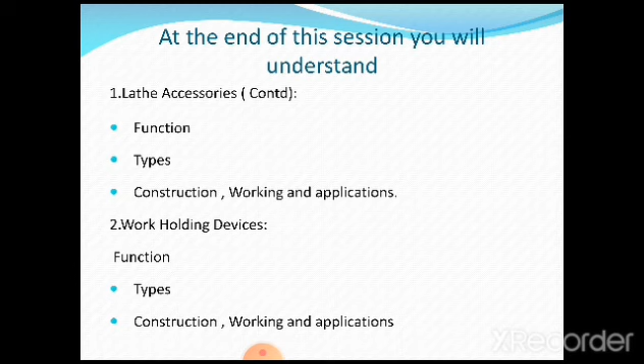In the last class we discussed lathe centers and chucks. We know very well, whenever we want to hold and rotate a very long workpiece, we generally use two types of centers. The headstock center is also known as a live center because it rotates along with the workpiece, and the center which is mounted on the tailstock supports the work and is stationary.

And whenever the workpieces to be held are slightly smaller but a bit larger in diameter, we use different types of chucks. We discussed the 3-jaw universal chuck, 4-jaw independent chuck, combination chuck, magnetic chuck, and collet chuck. All these chucks have different features and are used for holding different types of jobs. These concepts we have already discussed in the previous session.

Lathe centers and chucks are the most essential accessories, always used in our machine shop. The remaining ones we are going to discuss are used basically in industries, tool room lathes, and workshops with continuous production, where different types and diameters of jobs are held. Lathe centers and chucks are the most commonly used in polytechnic and engineering colleges; the remaining accessories are shown to demonstrate how they work, but we do not practically use them. So this is the main concept.

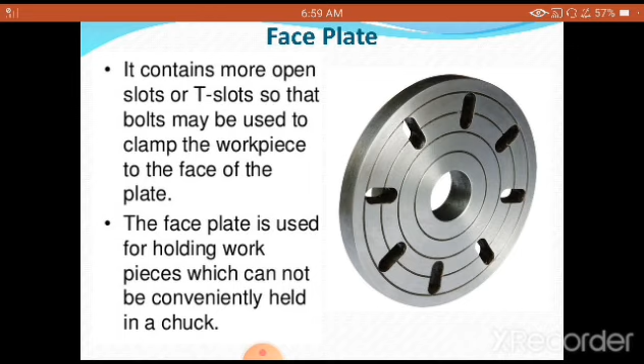The faceplate is used for holding workpieces which cannot be conveniently held in a chuck. If the configuration or shape of the workpiece is slightly irregular, in that condition we may require the faceplate. That is the main function of a faceplate.

The next one coming up, which is important, is called an angle plate. The reason to call it an angle plate is because it basically has two plates which are at 90 degrees to each other. So if you are going to see the views here, if you consider this as the front view, this is the figure which you are going to see.

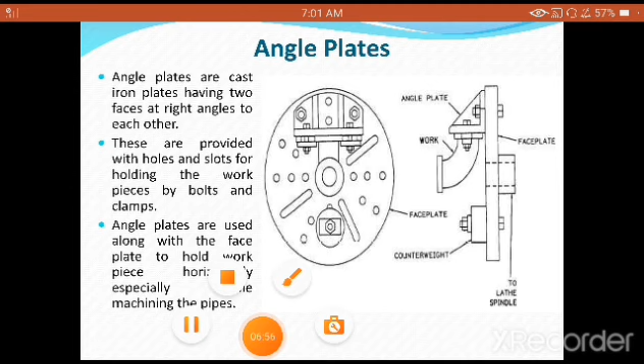Again I'll re-explain it. Suppose if I see this portion in this way, then this is the view which you are going to see; any one of them can be either side view or front view. Generally we consider this as a front view and this as a side view. So angle plates are cast iron plates having two faces at right angles to each other.

So let us see where it is now. Here are the different parts. The first one which you are going to see is a faceplate. A faceplate has to be used whenever I want to use the angle plates. As we have discussed, this is the configuration, the structure of an angle plate. This is a 90 degree plate which is directly mounted on a faceplate itself. This is the faceplate which you are going to see.

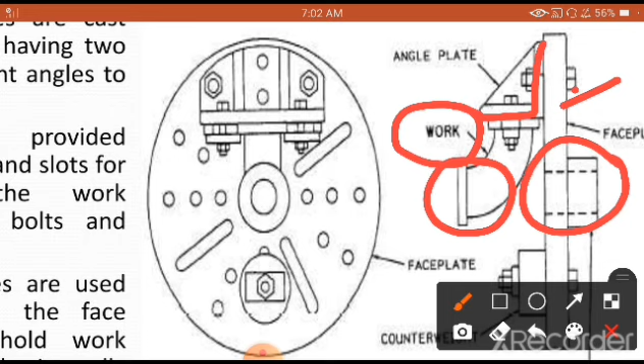The faceplate is directly mounted onto the headstock spindle, and at the front portion there is a mounting of the angle plate, and this is a typical workpiece which we require to machine. This workpiece is known as a pipe elbow, generally having a certain angle which is to be machined. It cannot be held firmly directly on a chuck or between the centers, so we require the help of an angle plate as well as a faceplate.

These are provided with holes and slots, as you are going to see here. Angle plates are also having holes like this for holding the workpieces by bolts and clamps, and you are also going to see clearly the bolts and clamps which are used there. Angle plates are used along with the faceplate.

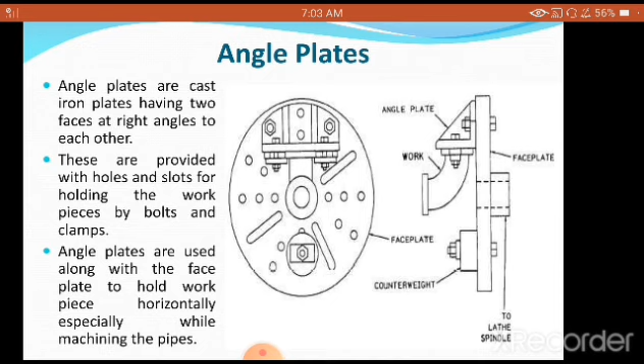Angle plates are always used with the faceplate only to hold the workpiece horizontally, especially while machining pipes. Whenever we want to go for certain angled pipes, we are going to use both the faceplate as well as the angle plate together for proper machining. So that is the main idea of using the angle plates.

Now let us go to the mandrels. This is also a very important concept. A mandrel is a solid shaft. Try to understand the definition here. It is a solid shaft made of high carbon steel. You already studied in your workshop technology the different types of materials along with their composition, properties and applications. We use high carbon steel because we require more wear resistance.

Because this is used basically for holding different diameter hollow workpieces, that is the main function of a mandrel. Now we are going to discuss it in detail. First we shall define a regular mandrel, which is commonly used. A mandrel is a solid shaft made of high carbon steel and mounted between the centers. This is very important: it is mounted between the tailstock center and headstock center, and this is called a mandrel.

On this mandrel we are going to mount the hollow workpieces. This is a hollow workpiece, meaning it is a hollow cylinder of a certain thickness which is directly mounted onto the mandrel. We require to hold at this end as well as the right end and the left end with the help of centers, for making the workpiece rotate. That is the main concept here.

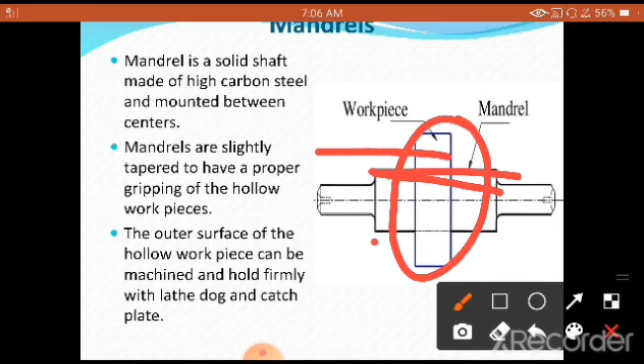Mandrels are slightly tapered. The main purpose of making them tapered, instead of straight, is to have proper gripping of the hollow workpieces. This is the main idea here. We want to hold firmly the hollow workpieces. For that purpose only, suppose if it is straight, then this workpiece will come out directly. So that is why it is slightly tapered, so that it can be held firmly.

The outer surface of the hollow workpiece can be machined. So now the main purpose is to machine this portion directly. For that purpose we are going to use the application of a mandrel. It can be machined and held firmly with the lathe dog and catch plate. These are additional accessories which are used, which we are going to discuss with sketches. But you need to understand that mandrel is used basically to hold the hollow workpieces. A mandrel is a solid shaft, tapered, used for holding hollow workpieces. That is the main function of a mandrel.

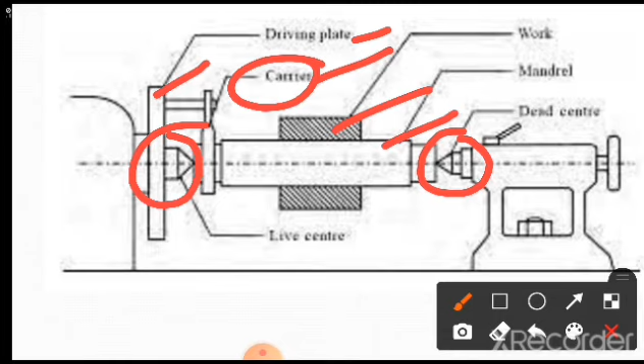Now you are going to see very clearly on the sketch the same figure. Here, this is called a live center and this is called a dead center, this is a mandrel, this is a workpiece, this is a carrier or lathe dog, and this is the driving plate. So all are mounted together. In this figure you will see how many accessories are required: driving plate, catch plate, and mandrel, and also the centers. So nearly 4 types of accessories are used for holding the hollow workpiece.

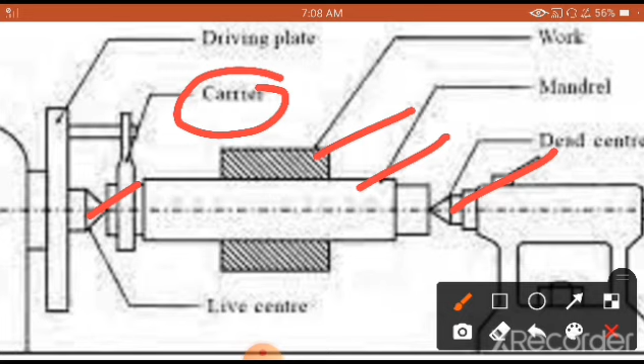Whatever workpiece you are going to see on the sketch is a hollow workpiece, held between the 2 centers. This portion is called the mandrel, this whole portion. This is a dead center, this is a live center, and whenever I want to hold the hollow workpiece I require a carrier and the driving plate. So what happens here is the mandrel is made to rotate, and along with that the workpiece is made to rotate, and these surfaces can be machined very easily, whatever diameter is there. Otherwise there is no other facility through which we can machine especially the hollow workpieces.

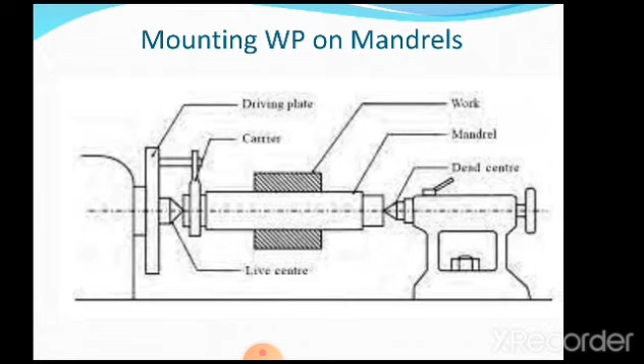The solid cylindrical rods or workpieces can be easily machined by holding between the centers or in a chuck. But if the workpiece is hollow, then we have to use mandrels. So this figure shows how the workpiece can be mounted using mandrels. Now let us understand in brief.

In mandrels also there are different types which are used depending upon the type of hollow workpiece. So that is what we are discussing. Nearly there are 7 types of mandrels which are used for holding the hollow workpieces.

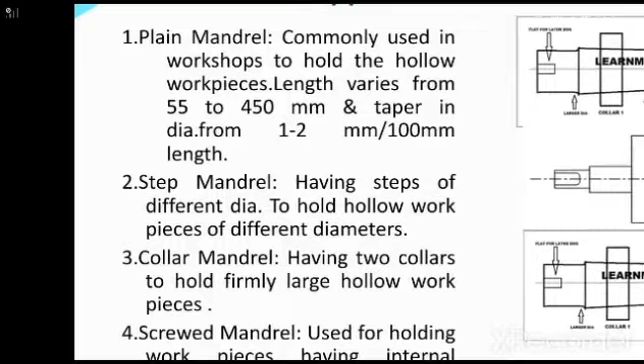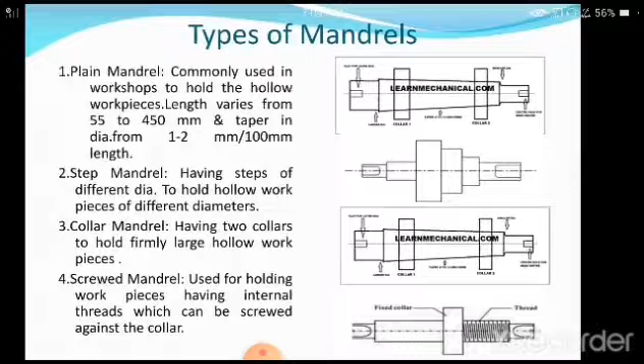Now let us start with the plain, meaning a commonly used mandrel. This is called a plain mandrel. Just we have discussed about that. It is having 2 collars here. So let us read: it is commonly used in workshops to hold the hollow workpieces. It is the most commonly used type of mandrel in the workshops. Length varies from 55 to 450 millimeters.

This means its length will vary. It varies from 55 millimeter to 450 millimeter maximum being produced. Then what amount of taper is it having? It is having a taper in diameter from 1 to 2 millimeter per 100 millimeter length. That means it should be slightly tapered.

Now we need to make the mandrel slightly tapered. If it is not tapered, the workpiece will come outside. So for that purpose, it is made slightly tapered, and the amount of tapering varies from 1 to 2 millimeters.

What is the meaning of taper here? If I go 100 mm along the length, I should have 1 or 2 millimeter diameter reduction. To give a simple example, suppose the length of the mandrel is 100 mm.

I have taken an example of 100 mm. If it is 100 mm length, then what should be the reduction? It should be 1 to 2. Suppose this diameter is 30 mm, then this diameter should be 28 or 29 mm. There should be a slight amount of tapering along the length.

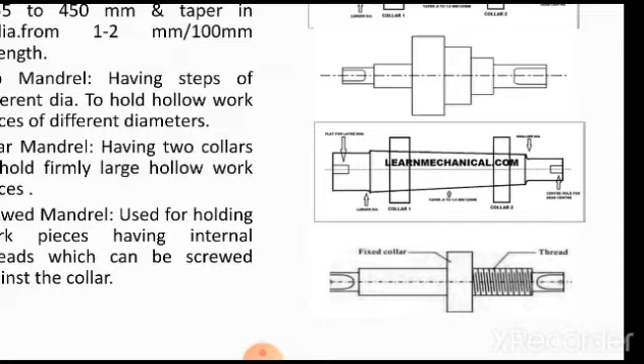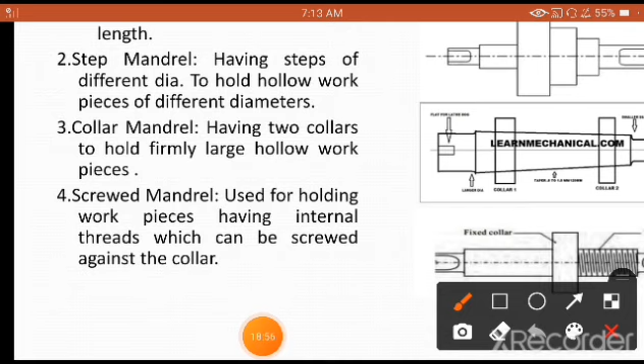The next one is the screwed mandrel. Screwed means what? The whole thing together we call a mandrel, but it is having screws here, as you will see on the screen. I will just show you now again.

I am making it slightly bigger now. Now you will have threads here and one side a fixed collar. Why is this used? Suppose our hollow workpiece has internal threads - then we can hold the entire hollow workpiece firmly onto it. In this portion, I can consider the hollow workpiece which has tapping or internal threads, so as to machine the external diameter.

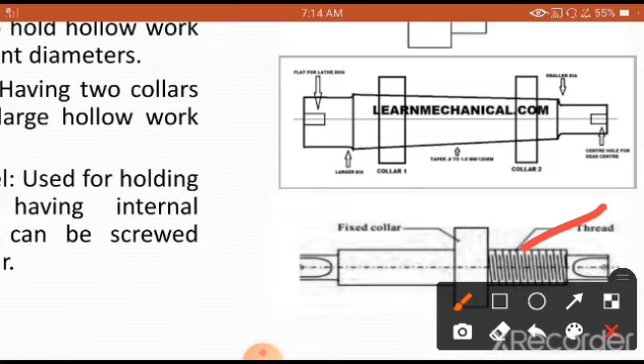That is the main function of the screwed mandrel, used for holding workpieces having internal threads which can be screwed against the collar. That is the main purpose of using the screwed mandrel.

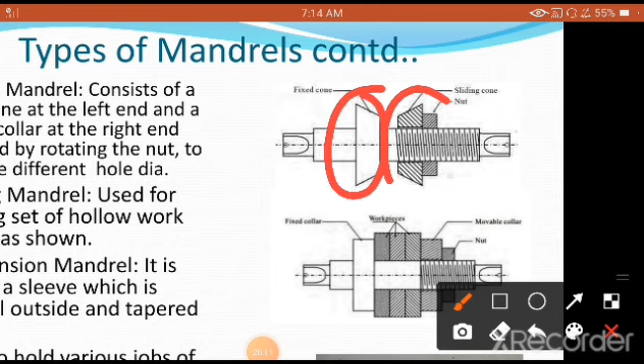Now let us go to the next type, called the cone mandrel. Cone means, as you can see clearly on the screen, two cones of the same shape. Remember, whatever dimension this one has, the same dimension should be for this one. So the workpiece will come here like this, and it can be held firmly.

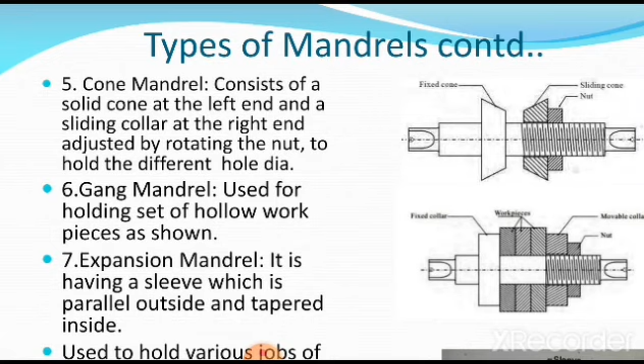It consists of a solid cone at the left end and a sliding collar at the right end. Solid cone means this cone is already fixed onto the mandrel, we cannot change it. But the collar on the right side is a movable one, meaning it can slide directly.

Wherever the position is, depending upon the length of the workpiece, I can hold the hollow work and use the nut to fix this sliding collar at a required position. That is the main concept here. At the right end, it is adjusted by rotating the nut to hold different hole diameters, depending upon the position of the sliding collar and the nut.

The next one coming up is a gang mandrel. As the name itself means, gang means more numbers, so it's used for holding a set of hollow workpieces as shown. These are all the different workpieces to be machined, and that is why it is called a gang mandrel.

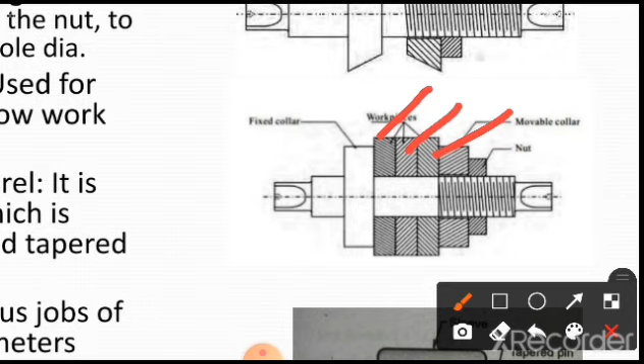You are going to see different workpieces being machined and held between the screwed mandrel. The mandrel usually is a screwed one, but I can use different workpieces. That is the plus point of using the gang mandrel.

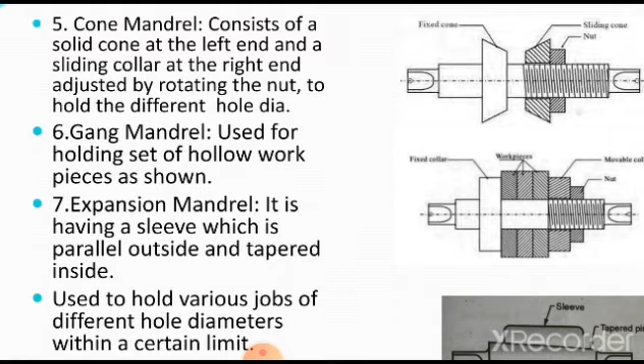Expansion mandrel. In the expansion mandrel, the figure I have not shown here, so directly I am going for the expansion mandrel. Gang mandrel is there, and cone mandrel is there. The expansion mandrel is having a sleeve which is parallel outside and tapered inside.

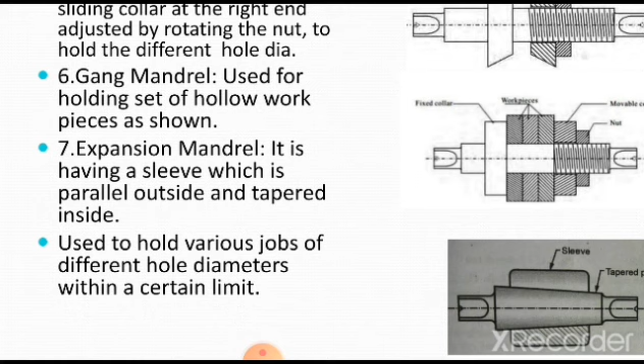This is called an expansion mandrel. Why it is called an expansion mandrel, I will explain. It is having a sleeve. Sleeve means what? It is nothing but again a hollow type piece, as you are going to see here on the screen.

This is called a sleeve, and this is a tapered pin which is used here, which we are not shown. So on this tapered portion we are going to put this sleeve. When I put this sleeve, I can use workpieces of different diameters because the outer surface is straight.

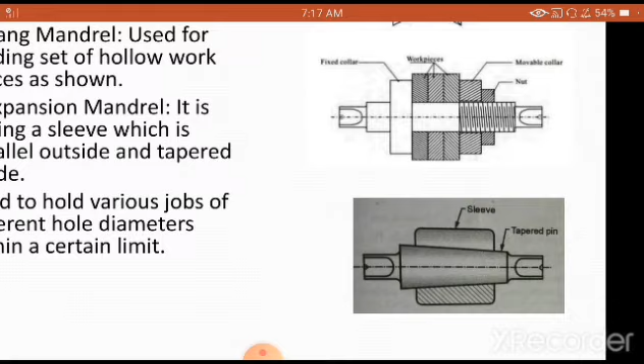So what I can do here is, it is having a sleeve which is parallel outside and tapered inside, used to hold various jobs of different hole diameters within a certain limit, but there is some limitation.

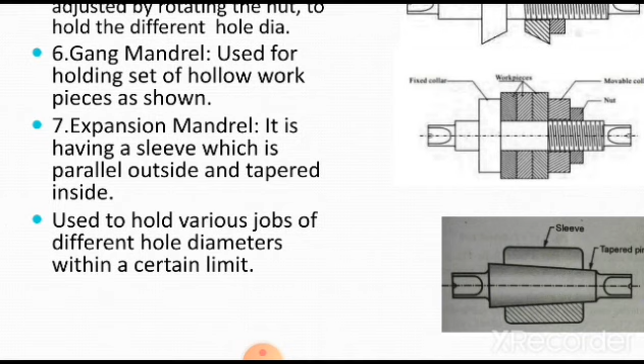Whatever the mandrels which we have discussed in today's session, these mandrels are used basically in industries where there is a requirement of continuous turning operation of hollow workpieces of different sizes.

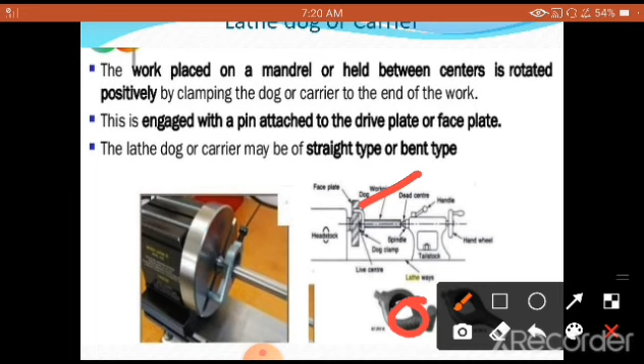Both have got the same applications. The bend portion which you are going to see here can be held firmly onto the face plate, which is having the slots, so that it can hold the workpiece very firmly. This is the main function of a lathe dog, which can provide a positive rotational drive without any slipping. That is the main idea here.

The next one coming up is called a catch plate or a driving plate. When a workpiece is held between the centers, the catch plate is used to drive it. If I want to hold any workpiece between the two centers, then we are going to take the help of a catch plate, which you are going to see on the screen. Again, I will be making it larger for better understanding.

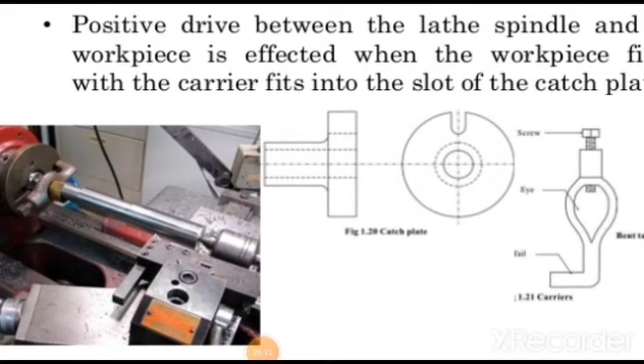Now you are going to see clearly on the screen here, this particular plate is called a catch plate. This portion will go inside the headstock and this portion will be coming outside, and it also has a slot like this. Now let us understand what its function is.

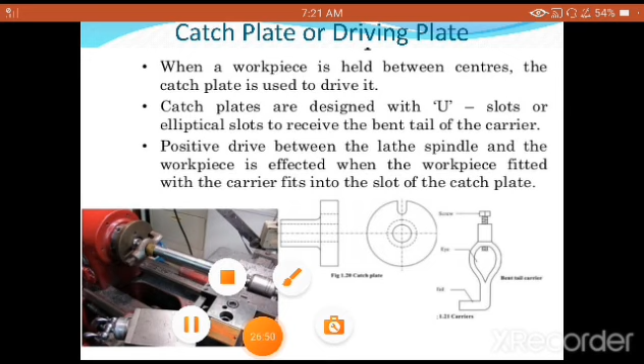Catch plates are designed with U slots. This is called a U slot on that plate, like a face plate, or elliptical slots. It can have elliptical slots to receive the bent tail of the carrier. So why is it used? It is used to fix this portion. I'll just show you now.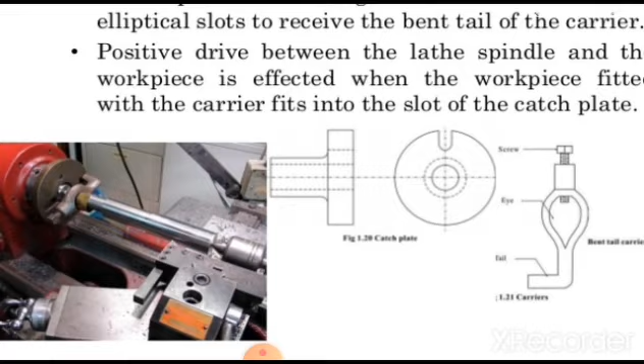See, this is called a U slot, and this is called a bent portion. This bent portion will be inserted into this for holding the workpieces. Catch plates are designed with U slots or elliptical slots to receive the bent tail of the carrier. Positive drive between the lathe spindle and the workpiece is effected when the workpiece fitted with the carrier fits into the slots of the catch plate.

That means whenever I want to use the lathe dog or carrier, I must use the catch plate or driving plate. Without that, it is not possible to hold the workpiece. The main function of this catch plate or driving plate along with the carrier or lathe dog is to give positive rotations, meaning correct rotations of the workpiece in general.

Please observe the figure shown there very clearly. Here also you are going to see two centers. This is a lathe dog, this is called a driving plate, and these are the two centers. The center is inside here like this, and this is how it is held firmly and rotated continuously for the machining, as you can see on the screen.

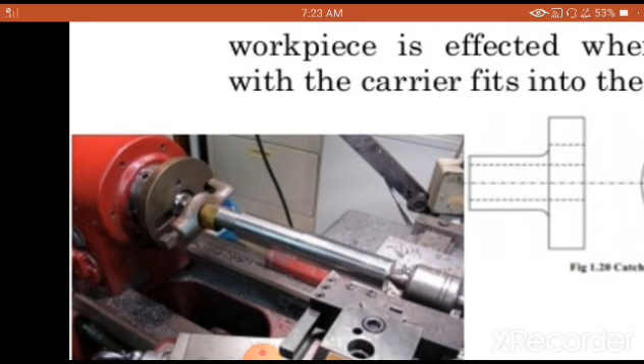Now let us understand the last concept, that is rests, R-E-S-T-S. As the name itself indicates, rests are kept at a particular location on a lathe bed, or sometimes they can be made to move, but generally we use the word rest because they are kept at a particular position between the two devices, that is headstock and tailstock.

A rest is a device which supports a long slender workpiece to be turned between centers. We know very well that centers are basically used for holding long workpieces. If we want to hold smaller workpieces, then we go for chucks. But if the workpiece is held between the two centers, what happens when the machining is done? The workpiece will start rotating in an eccentric way. That means we cannot provide perfect rotation of the workpiece due to high speed, because the length of the job or workpiece is more.

So in that condition, we need to take the help of rests. It is mounted on a lathe bed at some intermediate point to support the workpiece. The main function of the rest is to support the workpiece at a particular position between the two centers. It prevents the bending of the workpiece due to cutting forces and its own weight. So there are two conditions here.

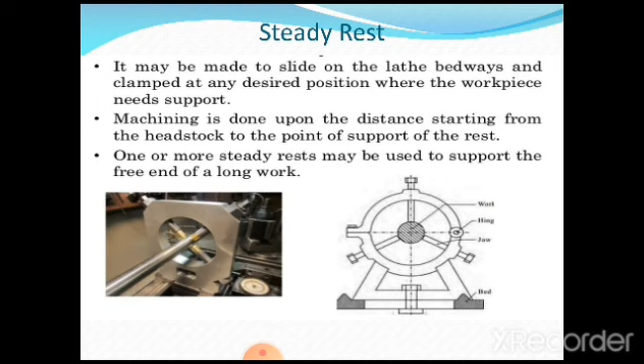Okay, machining is done upon the distance starting from the headstock to the point of the support of the rest. Wherever from the headstock towards the rest, it is possible to carry out the machining. One or more steady rests may be used to support the free end of a long work. So if the length of the workpiece is more, then you can go for two or more rests also. That depends.

Now observe clearly. Once again I will explain. This figure which you are going to see on the screen is called a steady rest. Why is it called steady? Because it is clamped directly at the required position on the lathe bed. This is the cross section of the lathe bed, and on that lathe bed we have fixed it. These are called the jaws. 3 jaws are there and this is the workpiece.

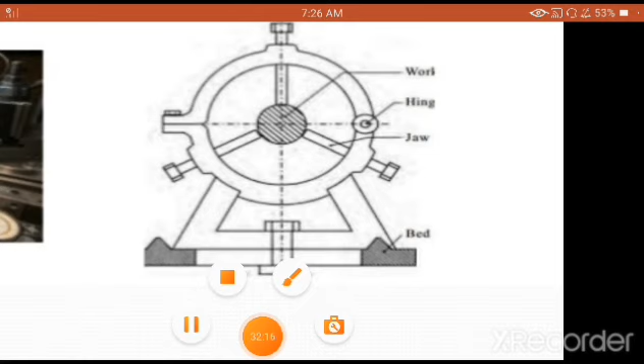These jaws will provide support at different points, exactly at 120 degrees, which you are going to see clearly on the screen. So as the workpiece is made to rotate, despite its high length, there is no vibration. The concentricity of the workpiece is maintained throughout the machining operation.

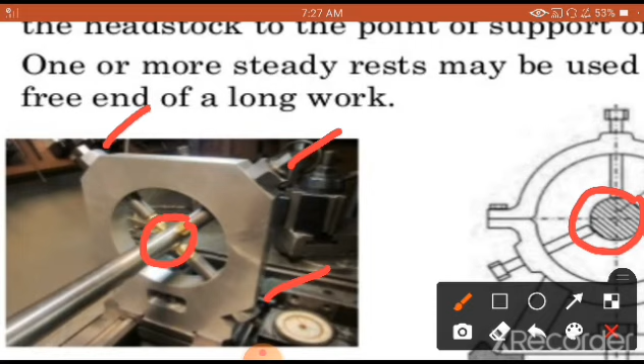The same one practically we have shown here. Observe here. One jaw is there, another jaw, and the third jaw, and this is the workpiece which is held. And this workpiece is the one we have shown here. That is what is shown clearly in the figure.

Now let us go to the next type of rest, called a follower rest. It consists of a C-like casting. Why is it called C? See how the shape is: it is just like a C. A C-like casting having 2 adjustable jaws. In case of a steady rest, as you have seen, it has 3 jaws, whereas in a follower rest there are only 2 jaws.

So why am I telling this? Because this is mounted on the carriage. It moves along with the cutting tool itself, and it is mounted exactly opposite to the tool post. I will read it out. It consists of a C-like casting having 2 adjustable jaws to support the workpiece.

The rest is bolted to the back end of the carriage. During machining, it supports the work and moves with the carriage. This is very, very important. It moves along with the carriage, so it follows the tool to give continuous support to the work, to be able to machine along the entire length of the work. That means on one side a tool post is there, and the rest is exactly on the opposite side.

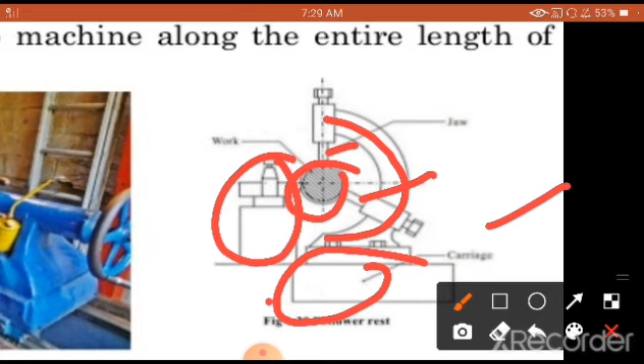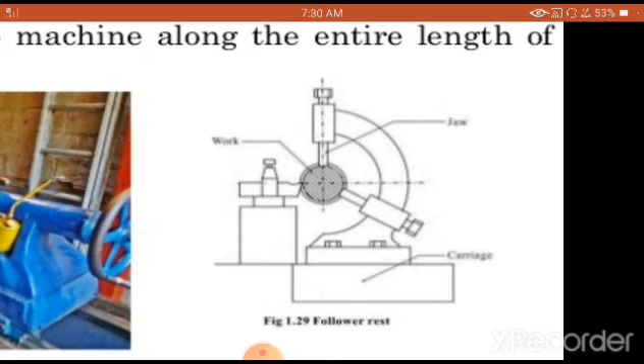Then this entire unit, the tool post as well as the follower rest, will start moving continuously, and the machining operation will be taking place. That is how it functions. The most important point you need to understand is the steady rest is always mounted on the lathe bed, whereas the follower rest is mounted on the carriage.

Try to remember that concept. So now the next one, I will show slightly bigger, as you are going to see on the screen very clearly. On one side you are going to see the workpiece, and on one side you are going to see the tool post, and on the other side you are going to see the follower rest.

Now let us understand what is the difference between the steady rest and the follower rest. This is the most expected question in the examinations. You need to understand very clearly. The first point of the steady rest is it provides support to a long slender work. It is providing a support, definitely.

So here it only provides a support, the steady rest, whereas the follower rest supports and prevents the workpiece from springing away when the cut is made by the tool. So it has a plus point, because the follower rest is made to move along with the cutting tool. That is why it supports and prevents the workpiece from springing away when the cut is made by the tool. The second point is it supports the work at its free end.

At its free end it is going to support, whereas in the case of the follower rest, it supports the workpiece just opposite side of the tool. It is going to support exactly because both the tool post and your follower rest are mounted on the carriage only, but both are on opposite sides.

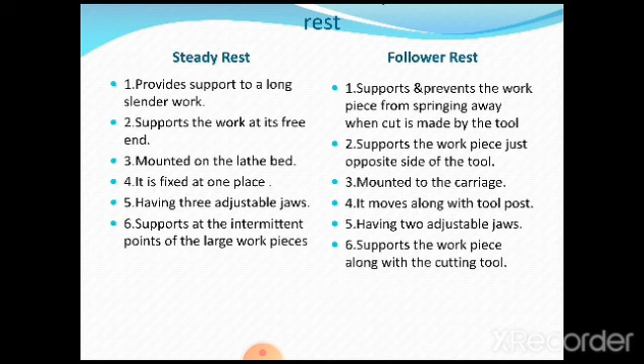So these are 6 important points to be noted in connection with how these rests help in carrying out the turning or machining operation if the length of the workpiece is very large and held between the 2 centers. So again, for understanding purpose, you are going to see clearly whatever we have discussed here.

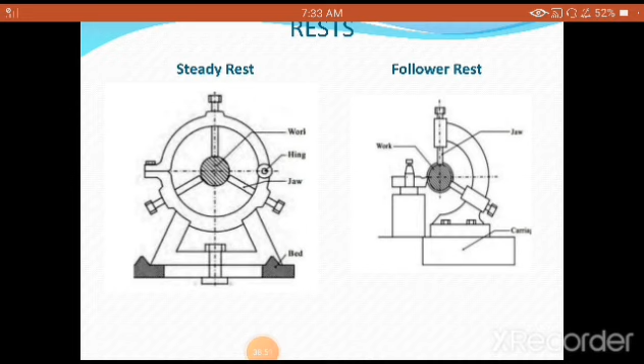You are going to see the steady rest, which is mounted on the lathe bed, and a follower rest, which is mounted on the carriage. You need to understand, this one is always movable, and this one is fixed onto the lathe bed, as you are going to see clearly on the screen.

Okay, so the next one: what are the methods of holding the work? This we have already discussed in the previous session. Just to clarify your doubts in connection with how the workpiece is held, we are discussing it in brief. So these are the different methods of holding the workpieces.

The first one is holding the work between the centers, which we already discussed, because centers are basically accessories used for holding long workpieces. Holding the work on a mandrel we have also discussed, especially for hollow workpieces. Holding the work in a chuck.

Different types of chucks are used for holding large diameter workpieces but of shorter length relatively, compared to holding between the centers. The next one is holding the work on a face plate. Whenever the workpiece shape is irregular, we can go for the face plate.

In between the chuck and the dead center. That means if the length of the workpiece is moderate, neither too large nor too small, in that case on one side we can hold it in the headstock chuck, and on the other side we can use the dead center of the tailstock, so that the machining or turning operation can be done very quickly and correctly.

Now we are coming to the end of today's session with the frequently asked questions. All the students have to prepare the answers for these questions, and all these things are already available in your app. Immediately after this session, before evening, I am going to put up all the slides of whatever I have discussed today. The same thing you have to write in a separate notebook. There will be no repetition of the syllabus.

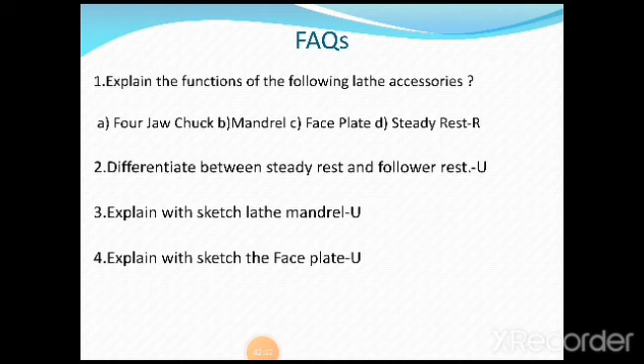So with this I conclude, but along with this I am also attaching one of the videos, which you need to watch completely, so that you will have a better understanding of the concepts.

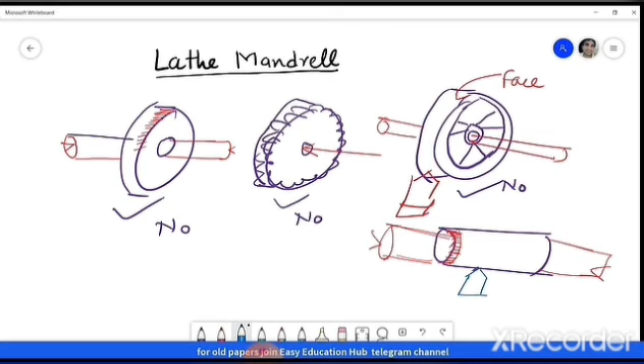जब इस पाइप को सीधे लेथ मशीन के चक में पकड़ लेते तो इसका किनारा पिचक जाता। अब जब इस पाइप के अंदर राड डाल दिया और इस राड को लेथ मशीन के चक में या इन बिटवीन सेंटर पकड़ेंगे तो किनारा पिचकने का डर नहीं रहता। दूसरी चीज, पाइप खोखला होता है और जैसे ही सिंगल पॉइंट कटिंग टूल कांटेक्ट कराते और कटिंग फोर्स लगाता, पाइप खोखला होने के कारण होल होने के चांसेस, पाइप की दीवार में छिद्र होने के चांसेस, या टूल के पाइप की दीवार में पेनिट्रेट कर जाने के चांसेस अधिक होते हैं।

आपने देखा कि इन सभी कार्यखंडों पर अगर लेथ मशीन की सहायता से मशीनिंग करनी हो तो इनके बीच का जो सेंट्रल होल है, इन खोखले कार्यखंडों के बीच में एक सॉलिड शाफ्ट या स्टील रॉड डाल दिया गया है। यही सॉलिड शाफ्ट या स्टील रॉड आगे चलकर मैंड्रेल कहा जाता है।

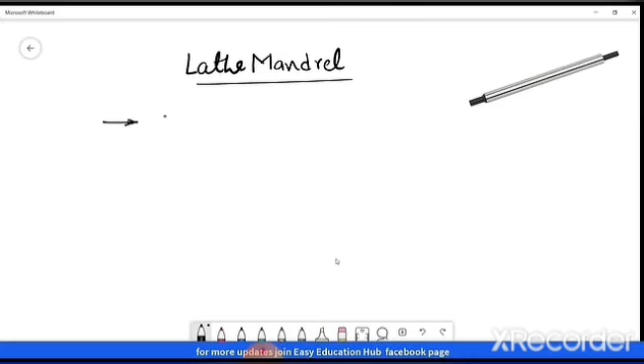लेथ मैंड्रेल की डेफिनिशन की बात करें तो आप सिंपली यह कह सकते हैं कि लेथ मैंड्रेल एक सॉलिड स्टील शाफ्ट होता है। लेथ मैंड्रेल का दूसरा नाम आर्बर भी होता है। लेथ मैंड्रेल को किसी खोखले कार्यखंड के होल के अंदर घुसाया जाता है, तो ग्रिप बनाने के लिए इस पर एक टेपर भी दिया जाता है। टेपर 0.5 mm पर मीटर का दिया जाता है।

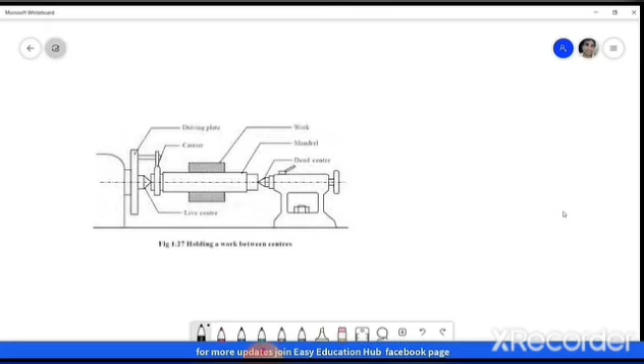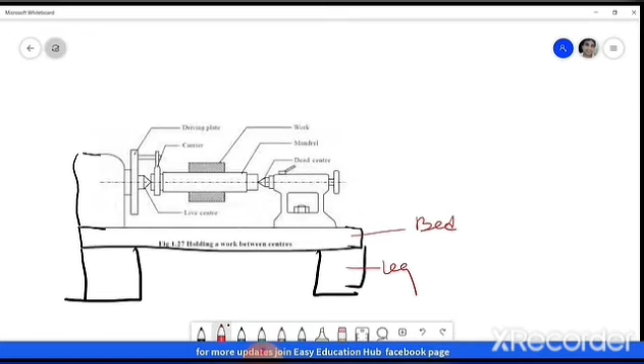लेथ मैंड्रेल के बारे में और अच्छे से समझने के लिए इस डायग्राम को ध्यान से देखिए। यह एक लेथ मशीन है। यहाँ नीचे बेड है, जो दिखाया नहीं गया, हम दिखा दे रहे हैं। बेड के नीचे पैर होता है, हम लेथ मशीन का लेग बना दे रहे हैं। इधर आधा अधूरा हेड स्टॉक बना है, इसे पूरा बना दे रहे हैं, यह हेड स्टॉक हो गया। यह बेड है, यह लेग है। यहाँ कैरिज नहीं दिखाया गया, कैरिज हेड स्टॉक और टेल स्टॉक के बीच लेथ बेड पर चलता रहता है। इधर टेल स्टॉक है, इधर हेड स्टॉक है।

अब एक कार्यखंड है सर्कुलर डिस्क, इसे ध्यान से देखिए, यह वर्कपीस है। यह वर्कपीस एक स्लीव की तरह है। इसे लेथ मशीन पर मशीनिंग करना है, तो सीधे चक में न पकड़ कर इसमें एक रॉड डाल दिया गया है, इस रॉड का नाम है मैंड्रेल। इसके अंदर रॉड डाल दिया गया है, इस रॉड को फिर इन बिटवीन सेंटर पकड़ लिया गया है।

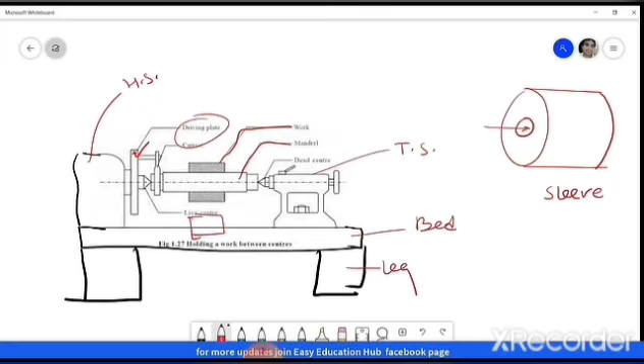इन बिटवीन सेंटर कैसे पकड़ते हैं, ड्राइविंग प्लेट, सेंटर और डॉग की सहायता से। यह ड्राइविंग प्लेट है, यह सेंटर है, यह डॉग है। लेथ मशीन पर इस्तेमाल की जाने वाली लेथ एक्सेसरीज में लेथ मैंड्रेल क्या होता है, इसके बारे में हमने डिटेल में बता दिया। अगर नहीं समझ में आया तो फिर से बता देना चाहते हैं कि लेथ मैंड्रेल एक खाली रॉड होता है, बस यही समझिए। इसका काम खोखले कार्यखंडों को लेथ मशीन पर चढ़ाने में सहूलियत प्रदान करना होता है।

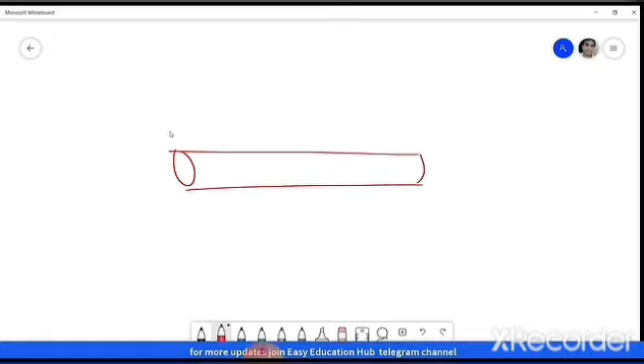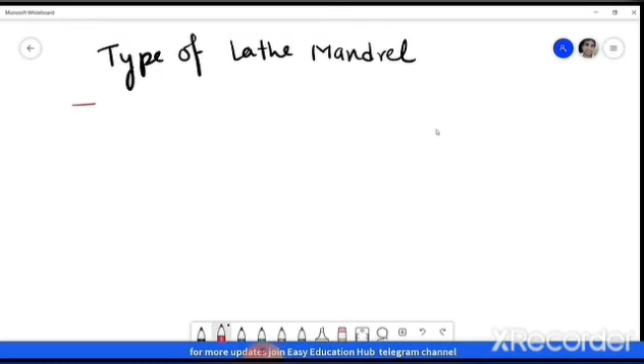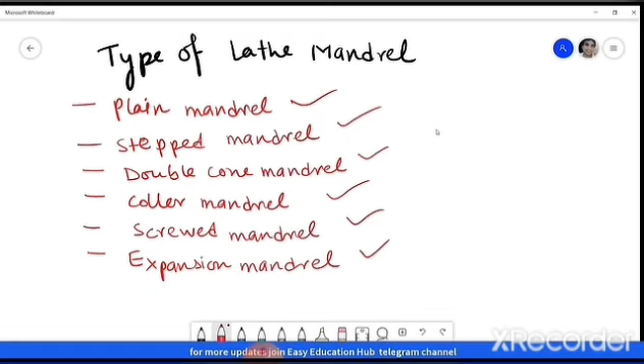लेथ मैंड्रेल की पढ़ाई में हम आगे बढ़ते हैं, आगे बताएंगे टाइप ऑफ लेथ मैंड्रेल, यानी लेथ मैंड्रेल के प्रकार। बताएंगे कि लेथ मैंड्रेल कितने प्रकार के होते हैं और किस प्रकार का इस्तेमाल कब किया जाता है। सबसे पहला टाइप है प्लेन मैंड्रेल, फिर स्टेप्ड मैंड्रेल, डबल कोन मैंड्रेल, कॉलर मैंड्रेल, स्क्रूड मैंड्रेल, एक्सपेंशन मैंड्रेल। अब एक एक करके हर मैंड्रेल की बनावट और इस्तेमाल देखेंगे। सबसे पहले देखते हैं कि प्लेन मैंड्रेल कैसा होता है।

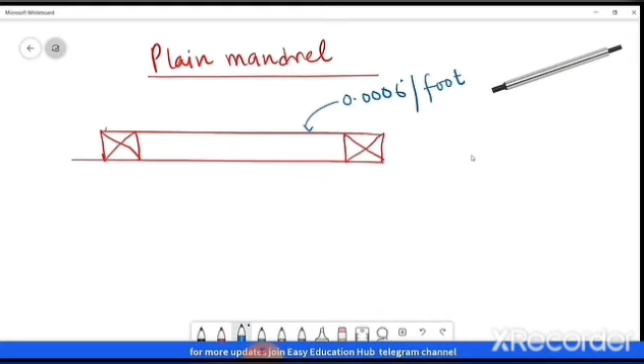प्लेन मैंड्रेल के बारे में बता दें कि यह कुछ विशेष नहीं होता। प्लेन मैंड्रेल एक स्टील शाफ्ट होता है जिस पर लगभग 0.0006 इंच पर फुट का टेपर होता है। इसका इस्तेमाल किसी सर्कुलर डिस्क के परिधि की मशीनिंग के लिए किया जाता है। इस सर्कुलर डिस्क को अगर बिना मैंड्रेल के लेथ मशीन पर चढ़ाने की कोशिश करेंगे तो यह पकड़ा नहीं जा सकता। ऐसे में इसमें एक प्लेन मैंड्रेल डाल देंगे, फिर इसे इन बिटवीन सेंटर पकड़ लेंगे। इसका इस्तेमाल सर्कुलर डिस्क एंड गियर ब्लैंक की मशीनिंग में करते हैं।

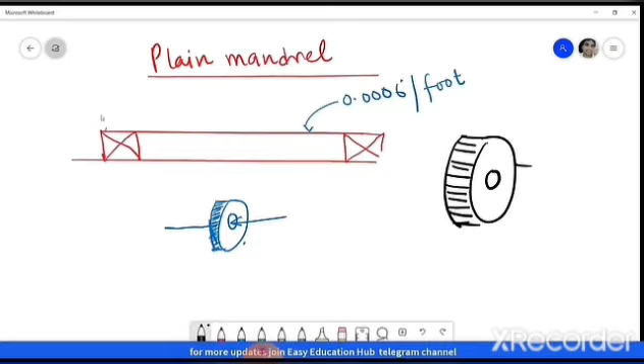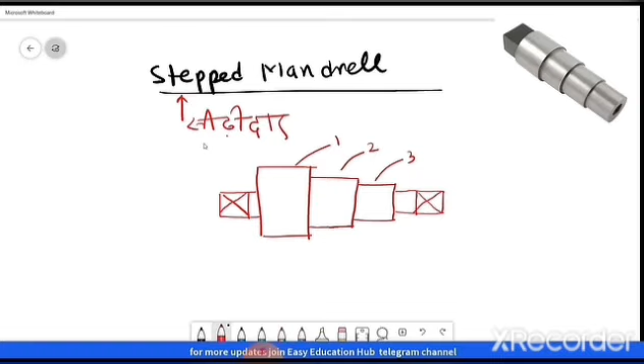अब अगले मैंड्रेल पर चलते हैं, जिसका नाम है स्टेप्ड मैंड्रेल। स्टेप का मतलब होता है सीढ़ी, तो यह सीढ़ीदार मैंड्रेल होता है। पहले दिखा दें कि यह देखने में कैसा होता है। इस मैंड्रेल को ध्यान से देखिए, इसमें 3 स्टेप बने हुए हैं, 1, 2 और 3। यह मैंड्रेल किसी लंबे कार्यखंड को सहारा तो नहीं दे सकता, परंतु ऐसा कार्यखंड...

जिसकी लंबाई खोखला कार्यखंड हो और उसकी लंबाई कम हो, ऐसे कार्यखंड को इसके ऊपर चढ़ाया जा सकता है। अलग अलग डायमीटर के कार्यखंड, जैसे इसका डायमीटर d है, उससे कम डायमीटर का अगर कोई कार्यखंड है तो उसको भी यह मैंड्रेल आसानी से पकड़ सकता है। इस पर 3 स्टेप हैं, इसका मतलब 3 अलग अलग डायमीटर के कार्यखंडों को यह आसानी से पकड़ सकता है।

इसमें और प्लेन मैंड्रेल में अंतर क्या है? प्लेन मैंड्रेल किसी एक ही साइज के कार्यखंड को पकड़ सकता है, लेकिन यह जो स्टेप्ड मैंड्रेल है यह अलग अलग डायमीटर के कार्यखंडों को आसानी से पकड़ सकता है। अधिक डायमीटर वाला कार्यखंड भी इस पर चढ़ाया जा सकता है, कम डायमीटर वाला भी चढ़ाया जा सकता है, मतलब 3 अलग अलग डायमीटर वाले खोखले कार्यखंडों का सहारा यह बन सकता है। लेकिन प्लेन मैंड्रेल की पूरी लंबाई का डायमीटर सेम था, तो वह किसी एक ही डायमीटर के खोखले कार्यखंड का सहारा बन सकता था।

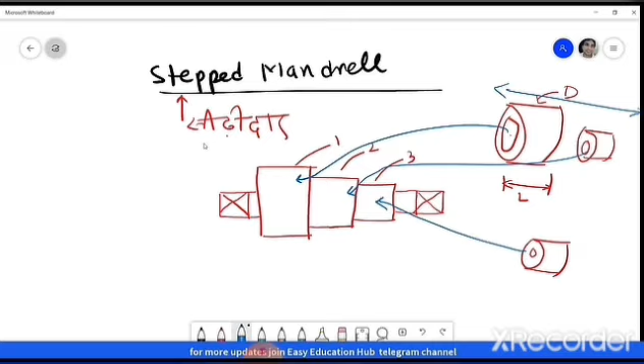प्लेन मैंडल में आपने देखा था कि वह लंबा था, इसका मतलब लंबे कार्यखंडों को सहारा दे सकता है। यह स्टेप मैंडल छोटे छोटे भागों में बटा हुआ है, तो यह किसी लंबे कार्यखंडों को सहारा नहीं दे सकता। अगर लंबाई बहुत अधिक हो जाती तो यह इसको सपोर्ट नहीं कर पाता। ऐसे में यह मैंडल कम लंबाई के कार्यखंडों के लिए इस्तेमाल किया जाता है।

अब हम अगले मैंडल पर चलते हैं, जिसका नाम है कॉलर मैंडल। यह मैंडल पूरी तरीके से प्लेन मैंडल की तरह होता है, लेकिन इसके दोनों सिरों पर कॉलर बने होते हैं। हमने स्क्रीन पर एक कॉलर मैंडल का डायग्राम खींच दिया है। प्लेन मैंडल पूरी लंबाई प्लेन था, लेकिन इस कॉलर मैंडल में 2 कॉलर बने हुए हैं, प्लेन मैंडल से अलग। इन्हीं दोनों कॉलर की वजह से इसे कॉलर मैंडल कहा जाता है। अब हम आपको समझाएंगे कि इस मैंडल का इस्तेमाल कहाँ किया जाता है।

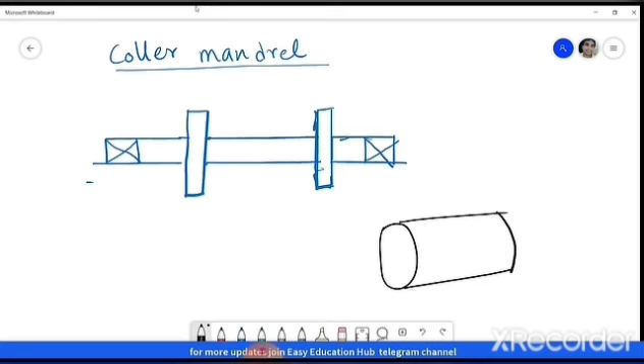इसे समझने के लिए ऐसा सोचिए कि एक बहुत अधिक डायमीटर का खोखला कार्यखंड है। इस कार्यखंड को लेथ मशीन पर चढ़ाने के लिए उसे मैंडल की जरूरत पड़ेगी। यह एक बहुत अधिक डायमीटर का है, जिसका डायमीटर d बहुत अधिक है, इसको लेथ मशीन पर चढ़ाने के लिए एक मैंडल की जरूरत पड़ेगी। जब मैंडल पूरी तरीके से सॉलिड होगा तो इतना अधिक डायमीटर के कार्यखंड को सहारा देने वाला मैंडल बहुत मोटा हो जाएगा।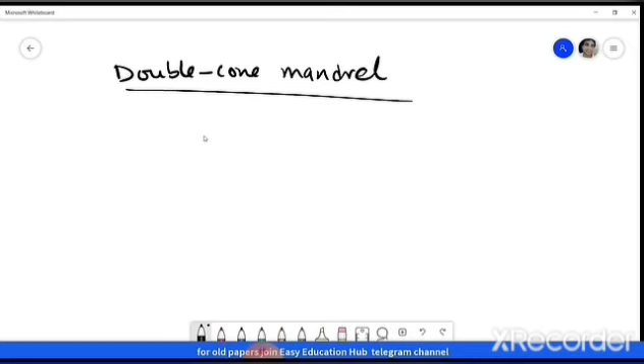अगला है डबल कोन मैंडल। डबल कोन, यहाँ पर आप एक शब्द देख रहे हैं, डबल कोन मतलब 2 शंकु। कोन मतलब शंकु, डबल मतलब दो। तो इसका मतलब यह हुआ कि यह एक ऐसा मैंडल है जिसमें दो शंकु जैसा कुछ होता है। हाँ, इसमें दो शंकु जैसा कुछ होता है। कैसा होता है?

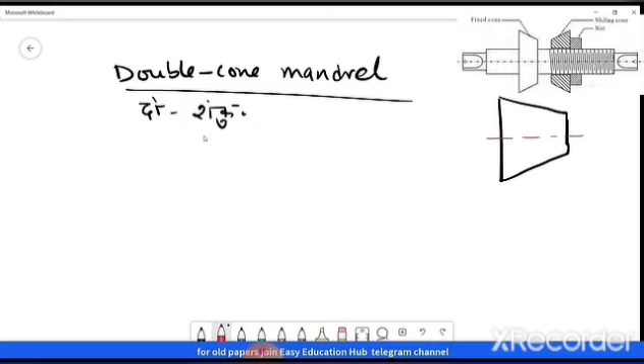एक शंकु है, इसमें आर पार ऐसे होल होता है। डबल कोन मैंडल में इस तरीके का दो शंकु इस्तेमाल किया जाता है। देखिए डबल कोन मैंडल कैसा होता है, हम आपको दिखा रहे हैं। इसमें एक इस तरीके का राड होता है, इस राड पर इधर की तरफ एक परमानेंट शंकु होता है, फिक्स होता है। इसमें इधर कुछ दूर तक चूड़ी बनी हुई होती है। यहाँ पर इधर से इसमें डाल देते हैं।

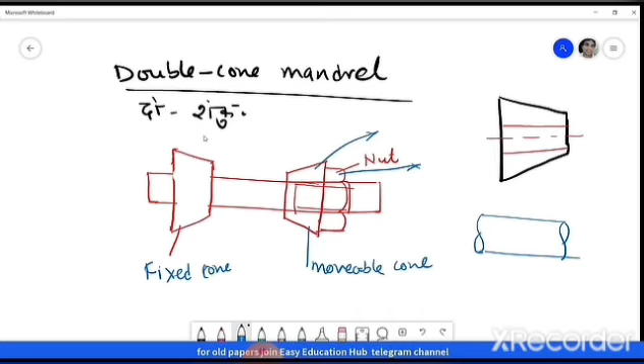डालने के बाद एक नट लगा करके इस चूड़ी पर टाइट कर देते हैं। देखिए हमने एक नट लगा दिया है। इसकी मशीनिंग डबल कोन मैंडल पर करनी है तो सबसे पहले इस नट को खोल करके हटा देंगे, फिर इस शंकु को बाहर निकाल लेंगे। उसके बाद इसको उठा करके इसके अंदर डाल देंगे। डालने के बाद यह इसके ऊपर ऐसे चढ़ जाएगा, इसके दीवार की कुछ मोटाई होगी ऐसे।

आप समझ पा रहे होंगे कि हम क्या समझाना चाह रहे हैं। सबसे पहले हम नट को खोल करके निकाल देंगे, उसके बाद यह कोन निकाल देंगे। उसके बाद फिक्स कोन पर सहारा देने के लिए हम अपने खोखले कार्यखंड को चढ़ा देंगे। चढ़ाने के बाद यह मूवेबल कोन लगा करके नट से टाइट कर देंगे। इसमें दो शंकु हैं, इसी वजह से इसे डबल कोन मैंडल कहते हैं। अब कार्यखंड मैंडल के ऊपर चढ़ गया। अब मैंडल को लेथ मशीन पर इन बिटवीन सेंटर या चक में पकड़ करके मशीनिंग कर सकते हैं।

इस प्रकार के मैंडल का इस्तेमाल कहाँ किया जाता है? इसका इस्तेमाल पाइप की मशीनिंग के लिए किया जाता है। देखिए सामान्यतया जैसे यह पाइप है तो इसके किनारे पर चूड़ी होती है। जब इसके किनारे पर चूड़ी होती है, इसको लेथ मशीन के चक में पकड़ने की कोशिश करेंगे तो यह पाइप पिचकने का डर है और चूड़ी खराब होने का डर है। ऐसे में इसे डबल कोन मैंडल पर चढ़ा करके मशीनिंग करते हैं।

अब कुछ बच्चों के दिमाग में आ रहा है कि इसको प्लेन मैंडल पर चढ़ा के क्यों मशीनिंग नहीं करेंगे। अगर पाइप बहुत लंबा है तो उसके साइज का प्लेन मैंडल चाहिए, तो प्लेन मैंडल बहुत लंबा चाहिए। दूसरी चीज, प्लेन मैंडल पर वर्कपीस टाइट चढ़ता है, तो एक बार अगर चढ़ा देंगे तो पाइप को फिर से प्लेन मैंडल से निकालने में बहुत मुश्किल होगी। अब हम चलते हैं अगले मैंडल पर जिसका नाम है एक्सपेंशन मैंडल।

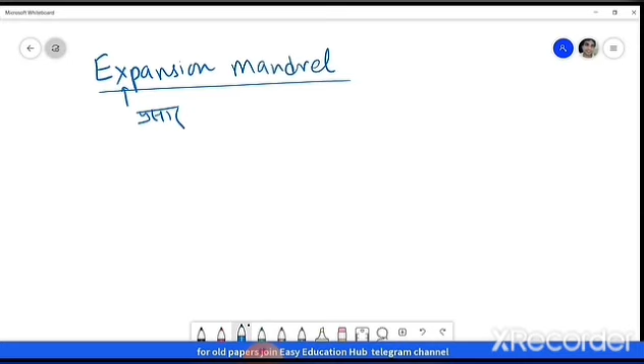इधर से हम धक्का देकर के कार्यखंड को जबरदस्ती इसके ऊपर चढ़ाने की कोशिश करेंगे तो यह बॉडी थोड़ा सा सिकुड़ जाएगा और कार्यखंड इसके ऊपर चढ़ जाएगा। तो यह कार्यखंड के अंदर की दीवार पर फैल करके चिपक जाएगा। मैंडल पूरी तरीके से अंदर से फैल करके सहारा दे देगा। इस वजह से इसका नाम है एक्सपेंशन मैंडल।

इस तरह से लेथ मैंडल के बारे में कंप्लीट जानकारी आपको दे दी गई है।